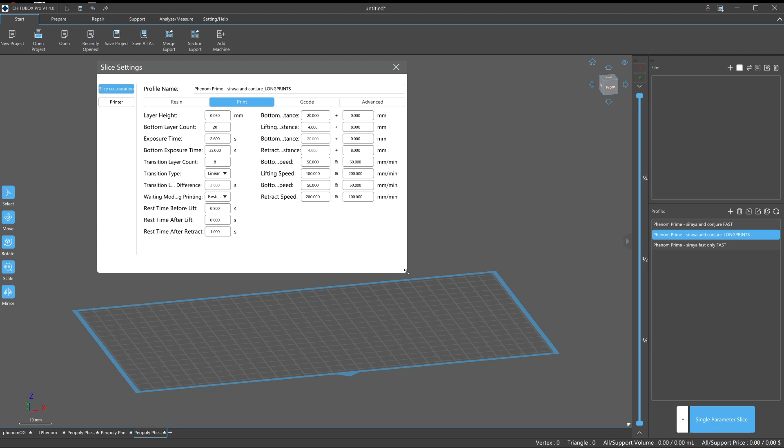Now it looks like they had to fix issues with the... there we go, okay, that's better. Font size, so bottom retract speed. Yeah, okay, so I really should have these set to 0 because I don't have any other values for the second stage of the retract. So that's pretty cool how that's picked that up.

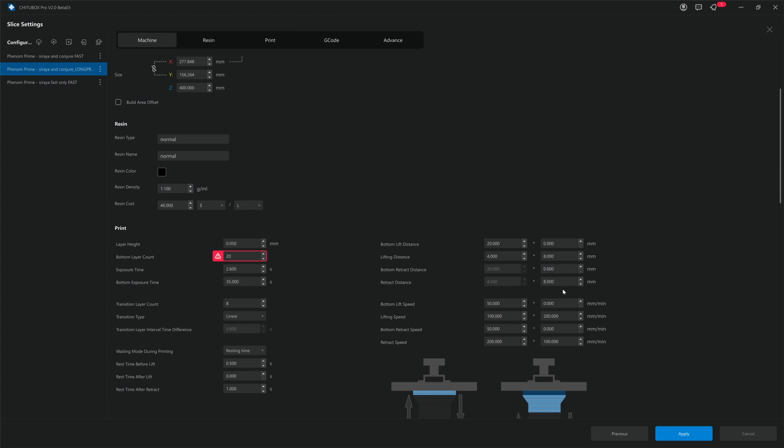So if I set this to 0, which is, yeah, great, okay, so that's good. That is a good feature. That's new. Now looking through the printer again.

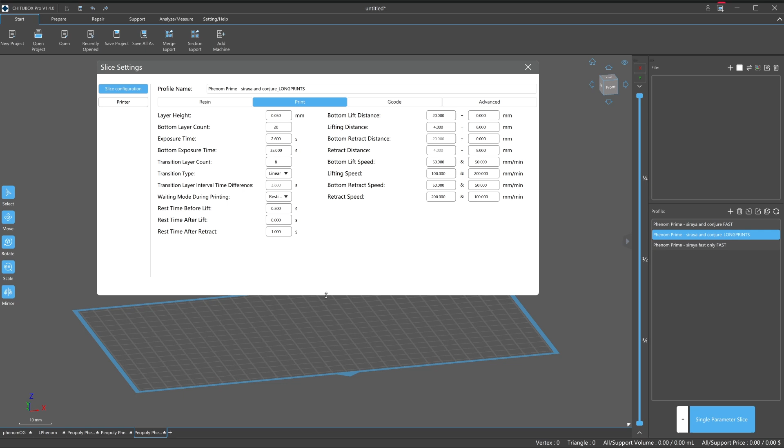Okay, so the only annoying thing I can see by combining both the printer and the resin together is you have to duplicate the printer setting on each one, whereas in the previous version you can copy that printer setting across. It's not a big deal, it's just a different workflow. So yeah, you can see here each profile has a machine setting or printer setting.

So if I don't hit apply, does it not save it? Does it? Okay, it does. Once you hit apply, it takes you to the main screen.

Oh, this is all different. Okay, so let's just go back. So if I close this and relaunch it, what happens? Because that new splash screen with that list, that's all new.

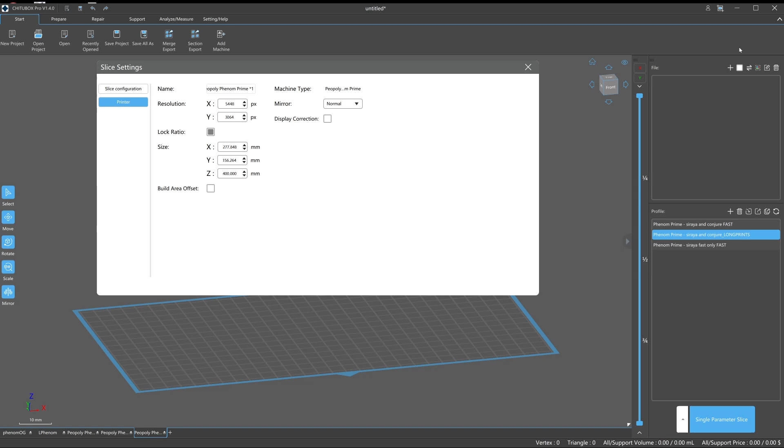I want to know if that shows up again the next time, because I'm running this the first time around. Ah, okay, that's interesting. So that new splash screen is, I guess, what you'll see if you launch this for the first time. And you've got a few annoying little pop-ups here, which I hope we can turn off.

So, okay, so this is the same as before, right? You can add different actual printers on the bottom, and your resin setting is on the right, which is exactly the same as before.

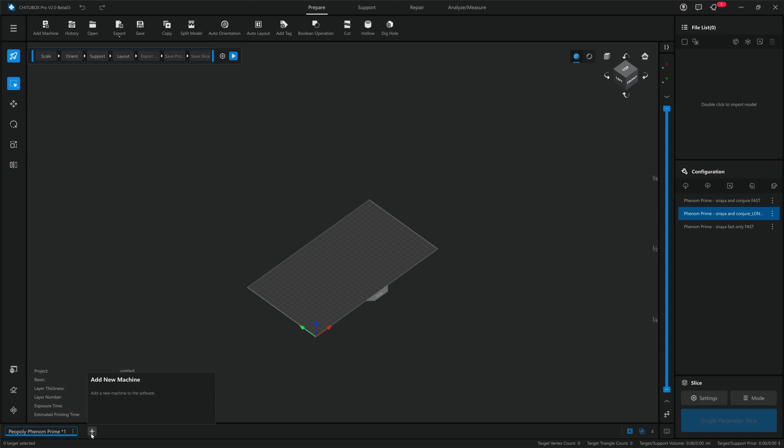So that's good. So yeah, if we add a new machine, okay, that brings up this new list. Interesting. Okay, so let's add in what they have for the Peopoly Prime. We'll just quickly compare the results.

Right, so that's their settings. New, I'm going to add new here. Okay, so yeah, so there, let me... new. Okay, so it looks like the settings do import in correctly, which is good.

What I'm going to do, this is all different. You've got a sliding menu. Alright.

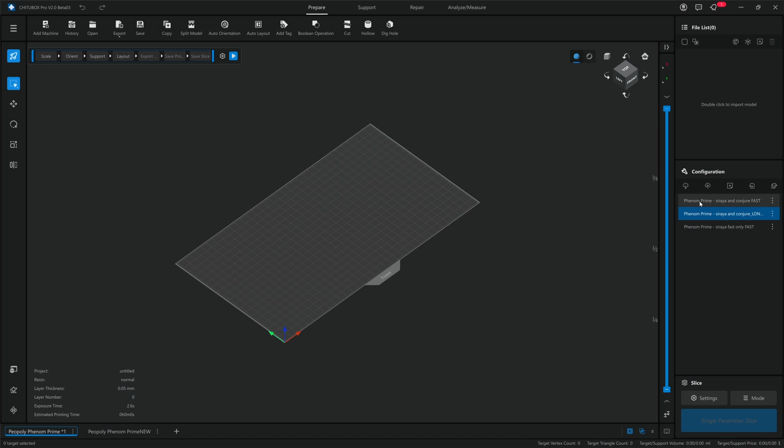So what am I doing here? I want to just rename this. Old. Rename the machine to old. Okay, so the machine setting, I think, carries across through to the different profiles. Yeah, you can open this as well. Okay, that's good.

Now I want to check. So this is new, I don't know what. Okay, so interesting, so it just has a graphical interface showing you what these values affect.

That's good. Now I do wish I could just make this go away. So I like having bottom layers at 20, just to make sure it sticks to the build plate, and that works fine for me. So I wish I could toggle the warnings off or click on it to ignore it, I guess. I don't know, it's a bit annoying having that marked as red, but it doesn't matter. Okay.

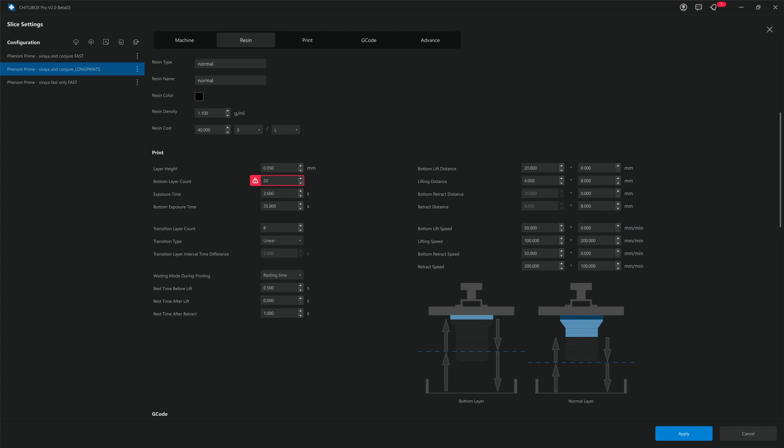Resin settings, resin type, yep, so that's all the same as before. The print settings, that looks all the same as before, I think. Point 0.5 and 1, 0.5 and 1, yep, so that's all imported fine. That's good. G code.

Advanced. Yep, so I have my light set to a slightly lower power. Anti-aliasing grayscale level.

Okay, so this slider is new. Now, if I show you the old version here, it has a little animation showing you what this does, what I'm looking for. Okay, yeah, oh, you can actually go even more now. So it goes from 2, 3, 4, 5, 6, 7, 8. Interesting, whereas this one only goes 2, 4, 8.

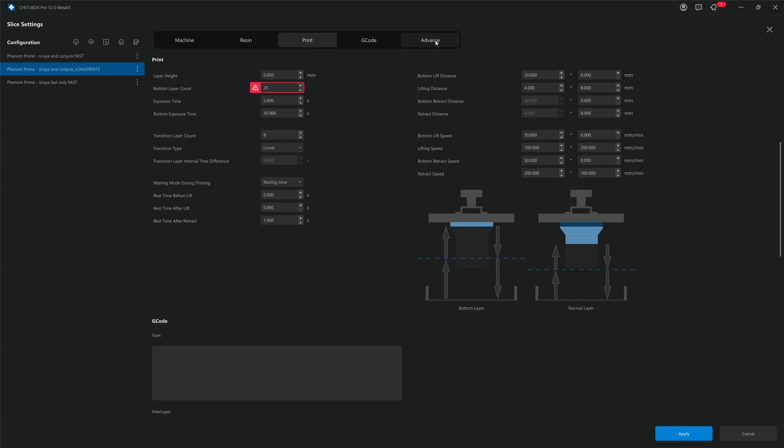Mask is new, interesting. Mask. Oh, okay, again I've never used any of this stuff, so I'm just going to leave it off. And then we go to check out advanced. Okay, so that's that, so you can look at all the settings on one screen here. That's good.

Okay, so yeah, so this shows that you can export your settings from version 1.4 into version 2, and it will carry across correctly, which is great. Now I'm going to check out the settings for the new version.

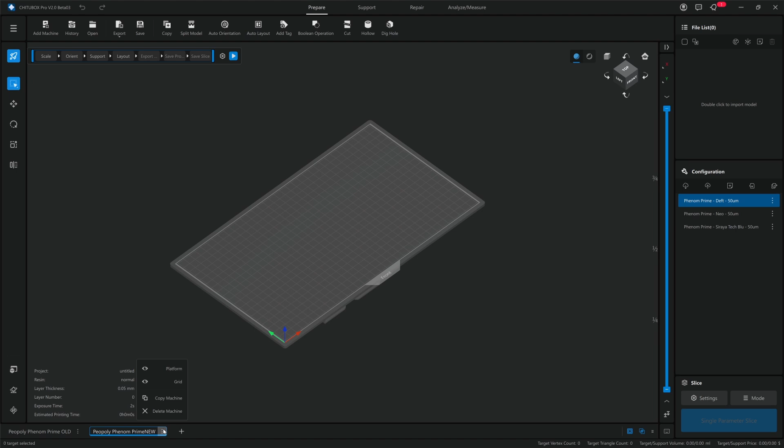I'm just going to see if there are any new settings. No, okay, that's great.

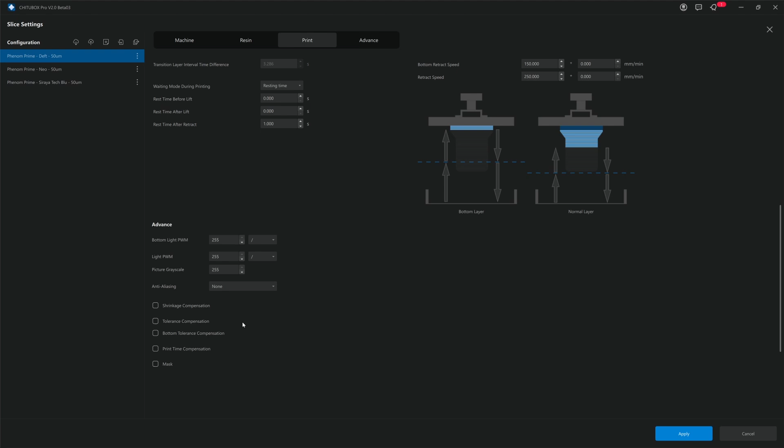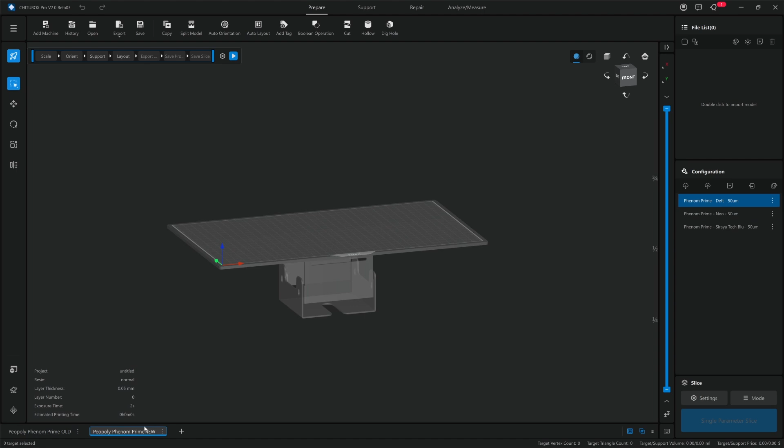The only issue I have is that this X and this X are too close together, so you'll probably at some point click on the wrong one. I have the annoying build plate view disabled on the old one, which carried across too.

Let's move on to the interface. The big change is the color between the old and the new. It just looks a little bit darker gray, which is fine, I guess. Maybe a bit too dark, but yeah, it's fine.

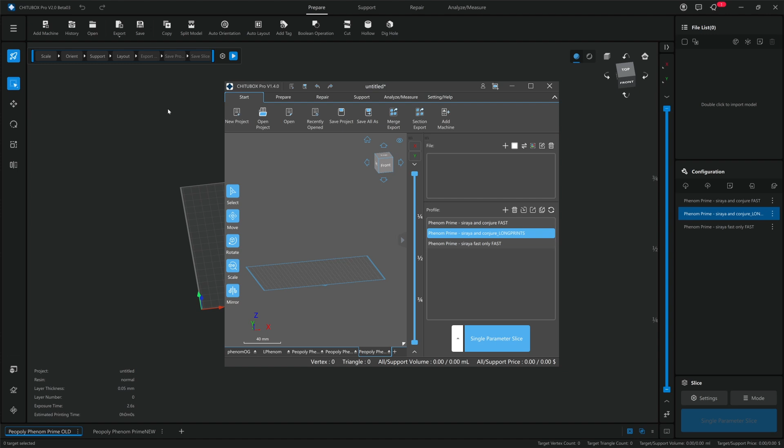Now the icons have replaced the drop-down menus. I do like how they had the different steps organized in their own tab up the top. It's still here, okay, yeah, that's all there as well. That's fine, it's just changed.

What else has changed? Got icons on the left, same as before. These are somewhat new. No icon tooltip, which is a bit annoying. So what am I doing when I click here?

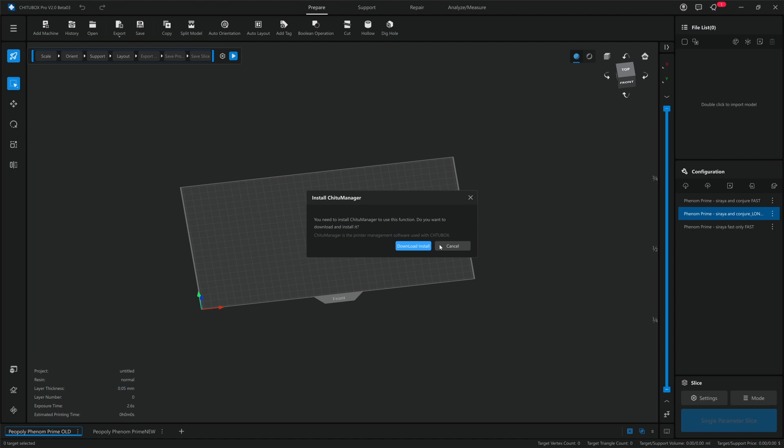Okay, you can import geometry. That's fine, this is the resin. Import settings. Chitu Manager - no, I've not used Chitu Manager and I don't want to install it. It's good that it doesn't force you to install the Chitu Manager with Chitubox Pro. Usually with these programs they bundle everything together, which gets annoying.

Now let's have a look at the interface. I am rotating, panning and zooming. That feels all the same as before.

Now I want to check settings. In the previous version, settings is in its own tab right here, so appearance, you can do your appearance and all that stuff. Now, where is settings in this new version?

This is slicer settings, right? Yeah, so this is slicer settings. Where is the actual program settings? Interesting.

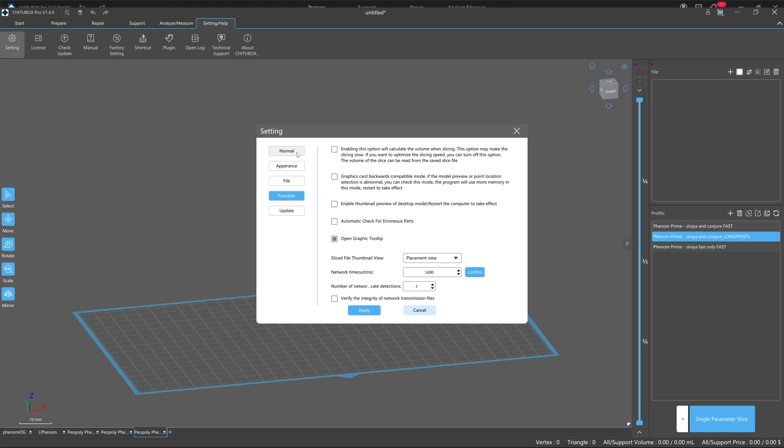So this was where I wanted to have a look. Let's see, I can't expand this window. Okay, that's fine. And if I go to the old version, yeah, the old version you can expand that, which is a bit easier.

Ortho, is it an ortho? Yeah, it was ortho. Placement view. What? That's a bit annoying.

Use same directory for saving and opening. I don't know, yeah, I'll take that, that seems logical.

Model rename, copy model, repair model, mirrored model. Okay. Project naming, okay.

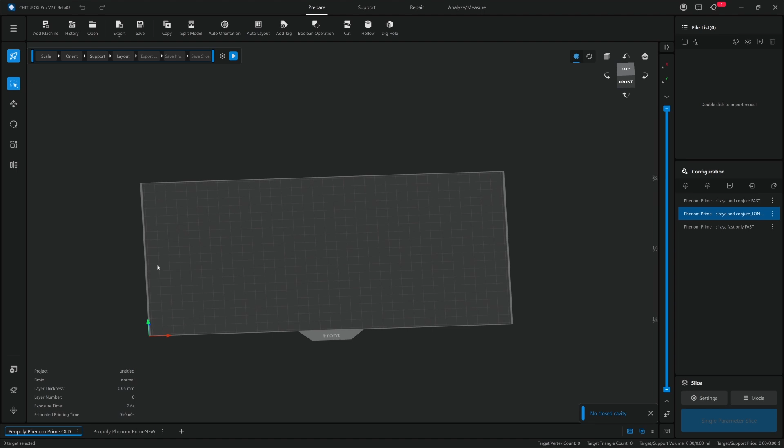So I know you guys want to get into the support making stuff and see what's new and all this other stuff, but I want to get all the presets, the initial setup out of the way first, because that's pretty important.

Now these are all new. On their website it's something called Chitu Accelerator or something. I still don't know what this does. Is it like a macro?

Must be like a macro thing that's... yeah, ChituAction, so it must be a macro to repeat. Interesting, repeats your process. Okay, I don't think I'll be playing with that today, but yeah, interesting - it's good you can switch it off.

Okay, so we've set up and imported the printer profile, the old printer profile, and let's import a model. So let's go to open, and I'm going to hunt for an OBJ file on my other window, and let's have a play with the Nosferatu piece that I recently sculpted and printed, and I'm going to import it in.

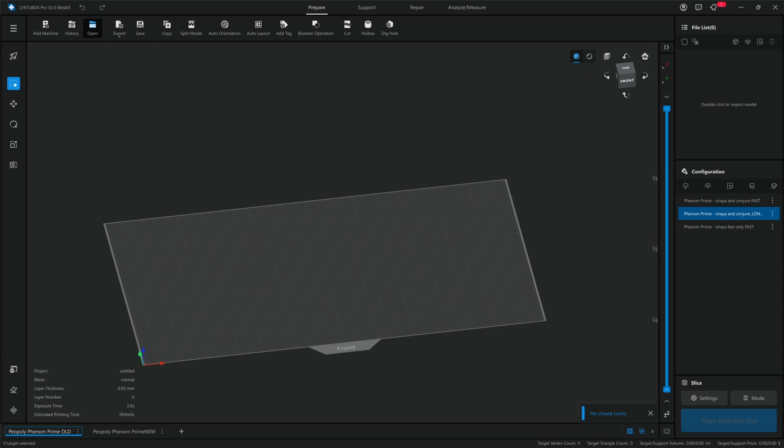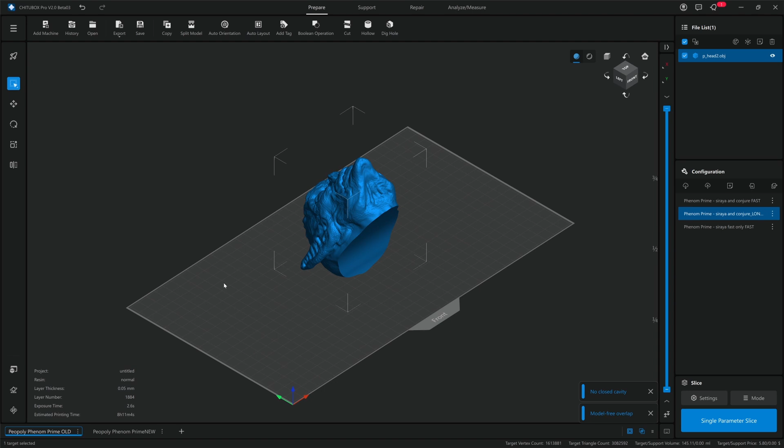This is an OBJ that has been exported from ZBrush, so this OBJ model hasn't been hollowed. I usually do my hollowing in Meshmixer. Just to be upfront, I don't use Chitubox for hollowing because I just prefer the manual process in Meshmixer - that's worked for me perfectly throughout the years I've been printing. But we are going to take a look at the Chitubox hollowing and adding holes, and let's see how that performs - the new version compared to Meshmixer.

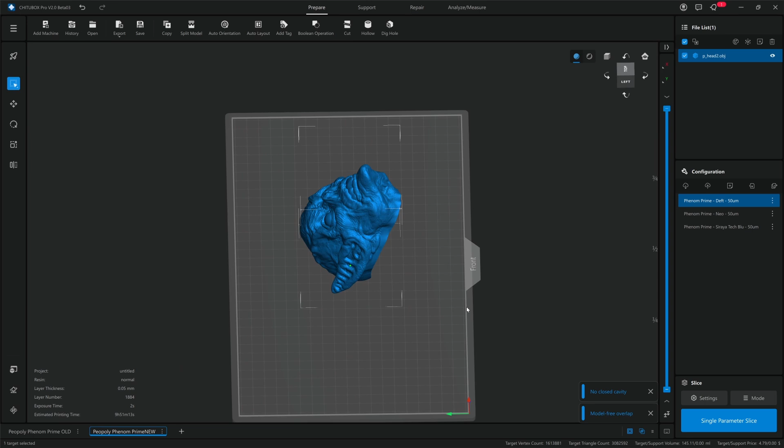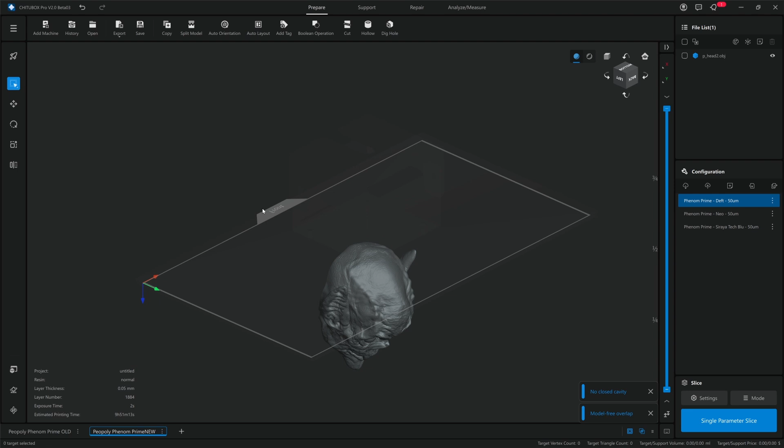Now, one thing I've noticed - yeah, they always say this is the front, but this is not the front. This is the back facing the rails, right? So yeah, if you're looking at it like so in the actual printer, right, they say front is here, but no, that's the back facing the rails, and this is the front facing the door. So yeah, just be aware of that.

When you're setting things up, I do wish you could change this. Okay, so let's have a look at the model now.

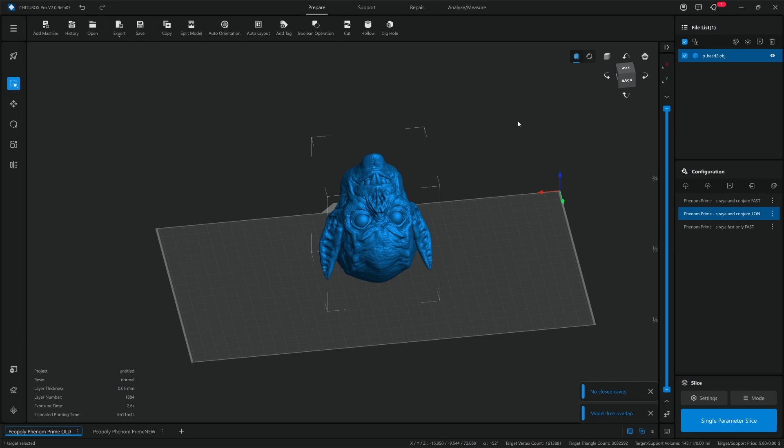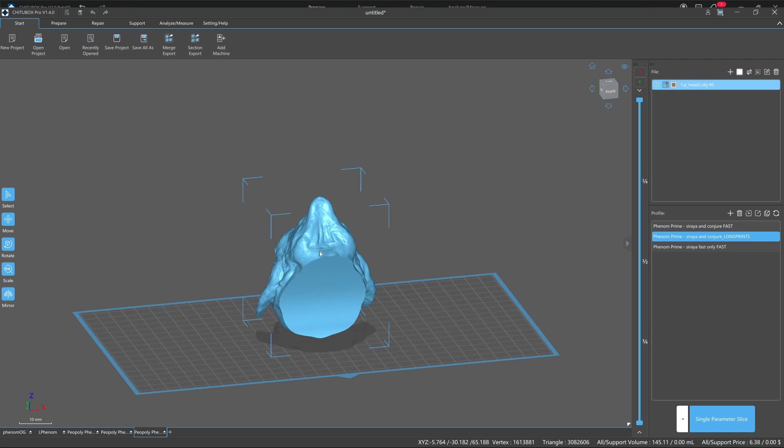One gripe I had in the previous version is you couldn't change the size of the rotation thing. So if I bring in the model on the old version, you can see on my screen it's really small for some reason. See how tiny mine is? In the old version, I have no idea why. It's pretty annoying. So let's have a look at the new version. Great, so it looks like they have changed this.

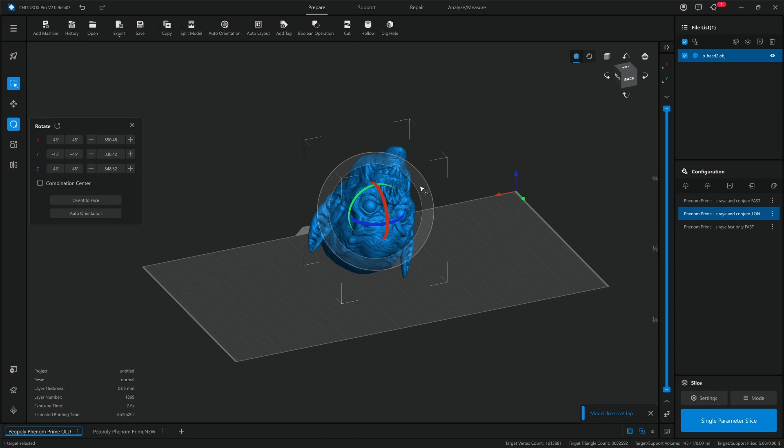It's at least slightly bigger, and you can rotate. These are new. Okay, so you can rotate by camera view angle. That's good. The second angle here, okay, yep, so that's all kind of normal.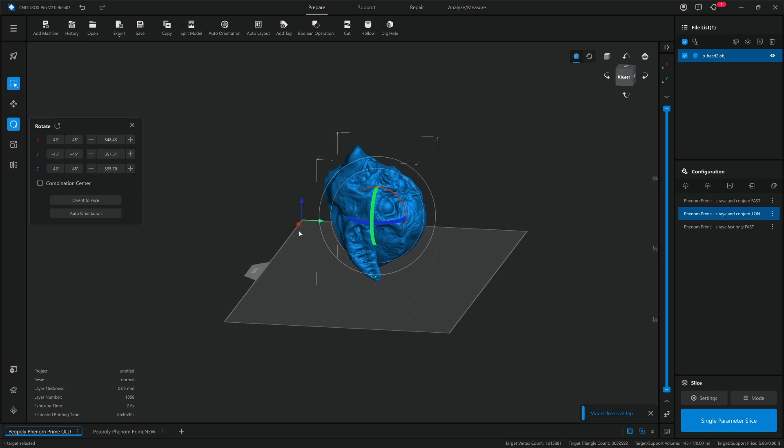Okay, and then we can reset. Yep, we can reset it. That's good. And we also have the presets here of 45 degrees. That's good.

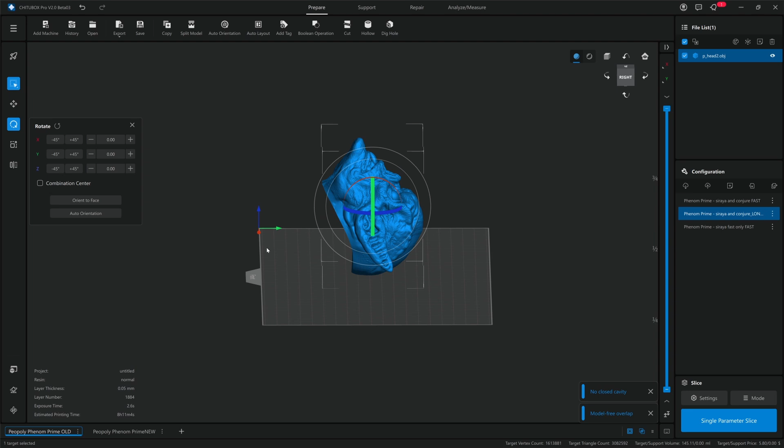Combination center, okay, I think that's when you have more than one model selected. That's fine. And orient to face, let's try this. Yep, that's fine, that's same as before. There's nothing new.

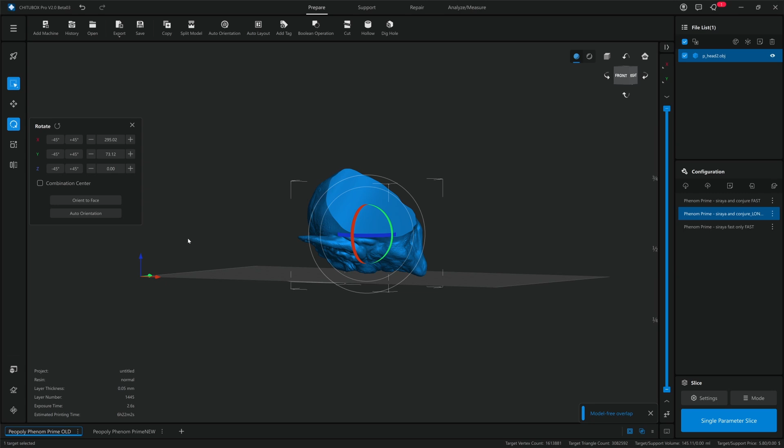Auto orientation, let's try this one. Ba-bow. Yeah, so this is one thing that's always been sort of not great. Auto orientation, that's probably never gonna give you the right orientation for printing. Let's try in the old one.

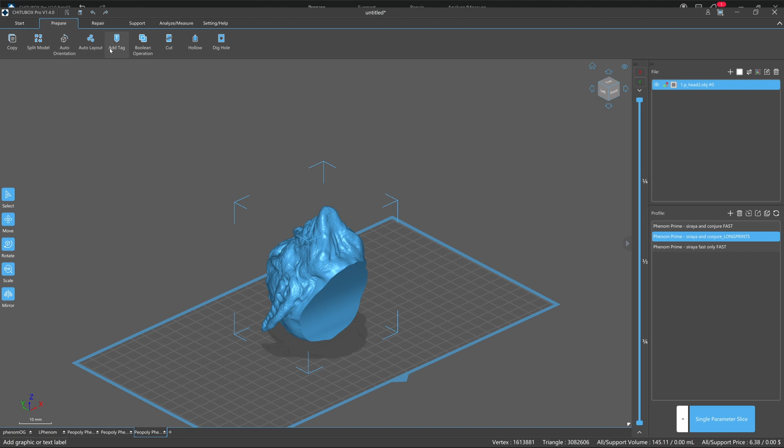The old one, I've never used auto orientation, but it looks like the old one doesn't have auto orient. I thought it did. It does, yeah. Okay, so it gives the same result. So it doesn't look like the algorithm has updated in the new version.

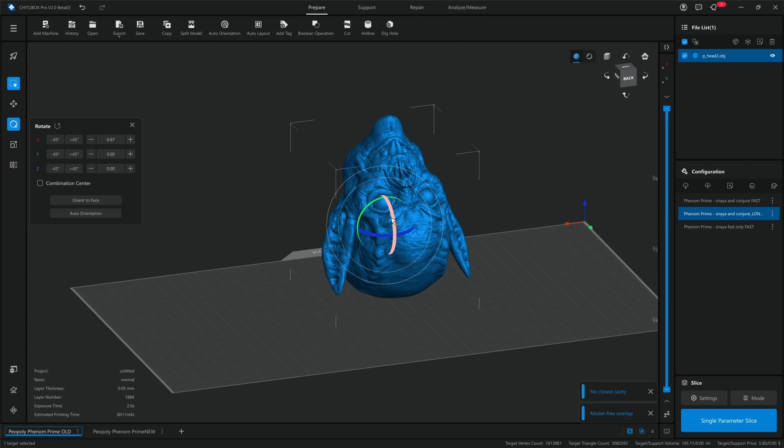So just be aware of that. But yeah, I never use it, so it doesn't bother me. For a part like this, this would be the orientation you want. Okay.

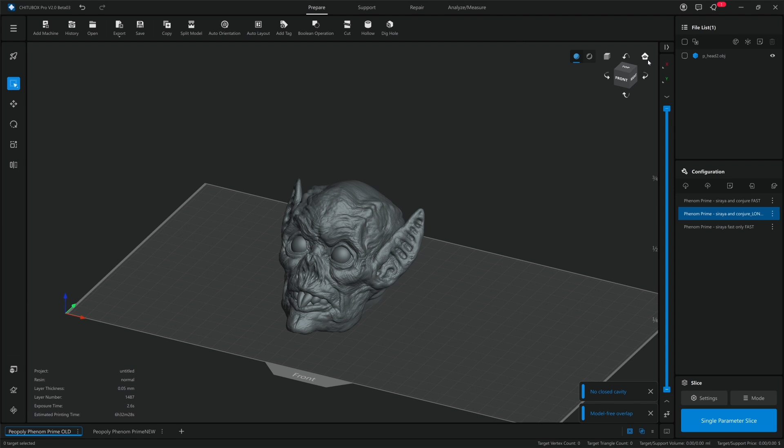Now let's see, okay, so it looks like you can change materials quickly now. That's good. Perspective, orthographic, that's a home button, and then you can also still click on that to get the orthographic view, which is great. So these are super helpful.

Okay, so I always work in orthographic view. I would recommend you do that too. Don't use perspective, it's just whacked. And it also looks like, yeah, the little detection things seem like it's doing stuff.

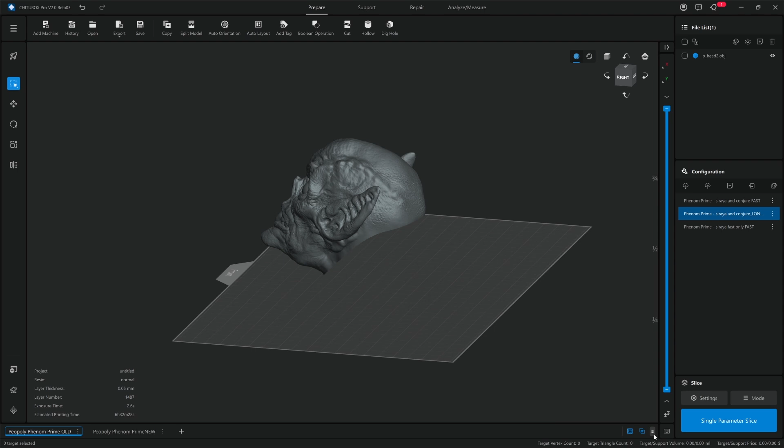Now, just to let you know, I'm running on a pretty powerful machine. It's a Windows i7 with 16 gigs of RAM and a 3080 RTX graphics card.

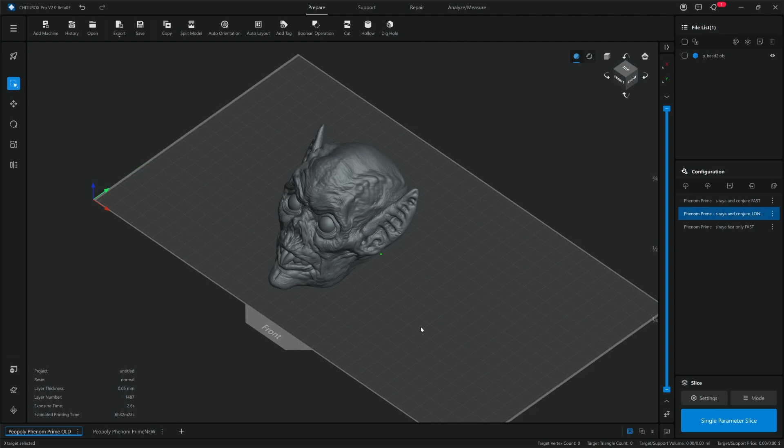Okay, so once we've imported in the model, these are all your normal stuff that you can use to rotate, scale. What is this? Mirror.

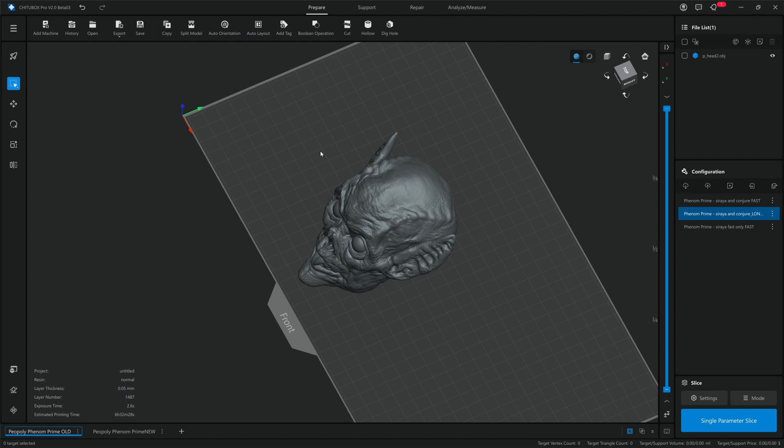Okay, now the next thing, let's look at support. Add tag, what is add? Sorry, next thing, let's have a look at hollowing. Yeah, why not?

In the file list, yep, that seems the same as before. Okay, so let's do a hollow and see. Wall thickness.

.2, damn, that's pretty thin. No, we want to set it to 1.85. Precision: low, middle, high. Let's go with middle for now. Inner, outer, bottom through.

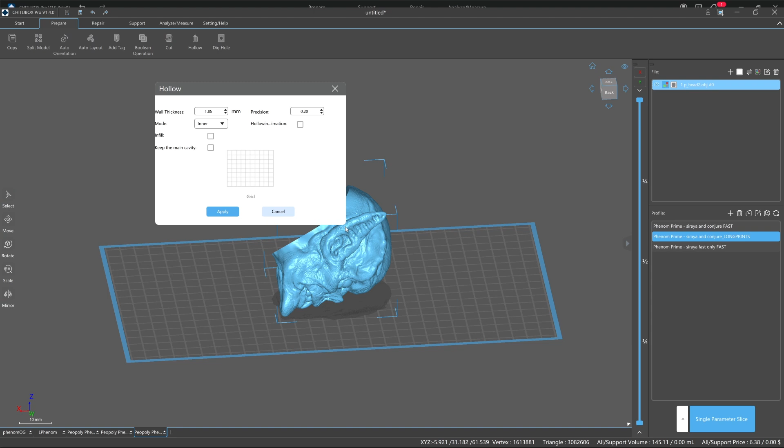This seems new. Again, I don't use the hollow feature in Chitubox, I do it manually in Meshmixer. But let's see what it does. And inner mode is normal. Keep the main cavity, yeah, all right. Let's see.

It's pretty slow. I do have OBS running to capture screen capture, but yeah, it's not fast. There we go.

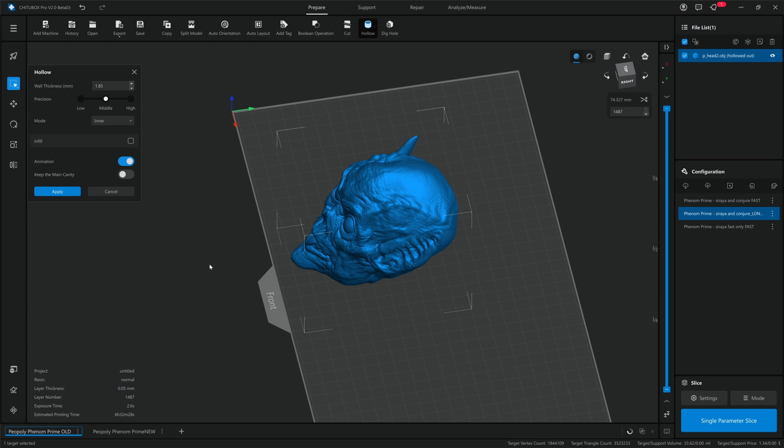Okay, so one thing I have noticed with Chitubox hollowing is it likes to add layer lines on here. So let's just hit apply, and we'll say OK. And let's do the same thing in the old version, and let's see if there are any major differences. Because I do know some of you guys will be using the hollowing feature in Chitubox, so I do want to show the difference between the old and the new version.

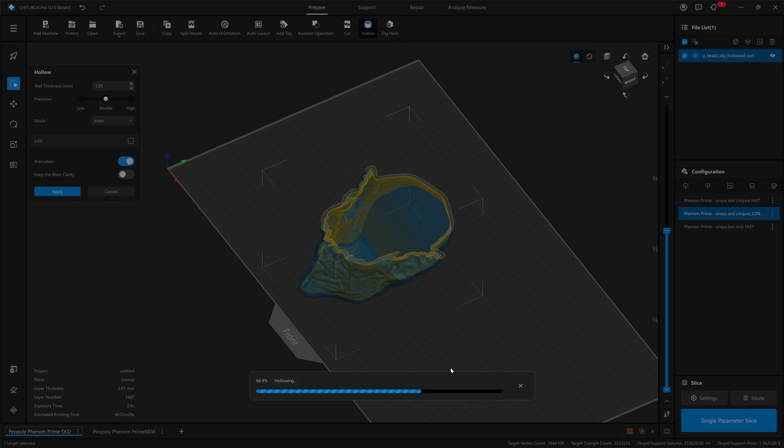Yeah, the thing, that's weird. Okay, so it looks like it's applying it twice. Or did I, yeah, okay, I must have pressed it twice. I wonder if it's gonna freak out. No, didn't freak out.

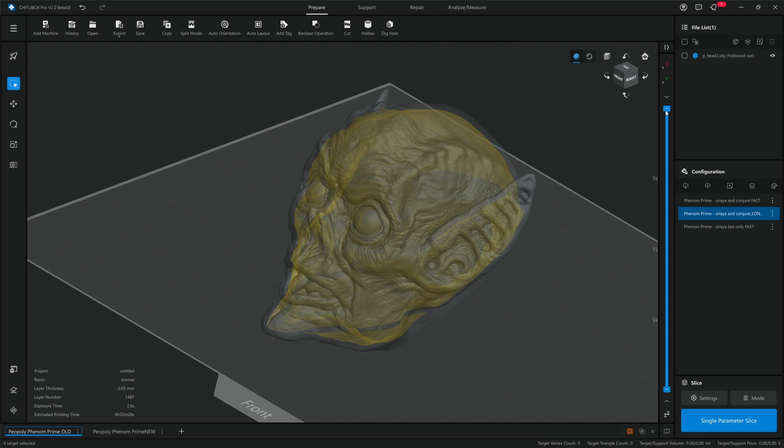So, ooh, I don't know this, what is this yellow thing?

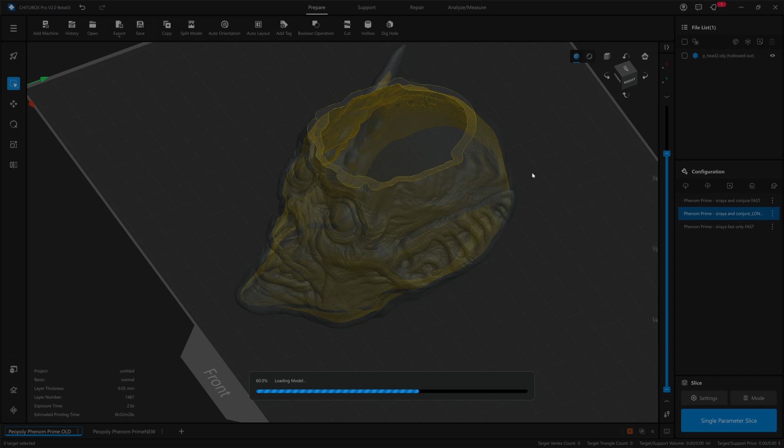Okay, so what I'm going to do, I'm going to import in a hollowed model of this head already. As I said, I've already printed this out, so I know this model is good. And I'm going to bring in the hollowed model that I made in Meshmixer manually, okay? So I can show you guys the difference between the two.

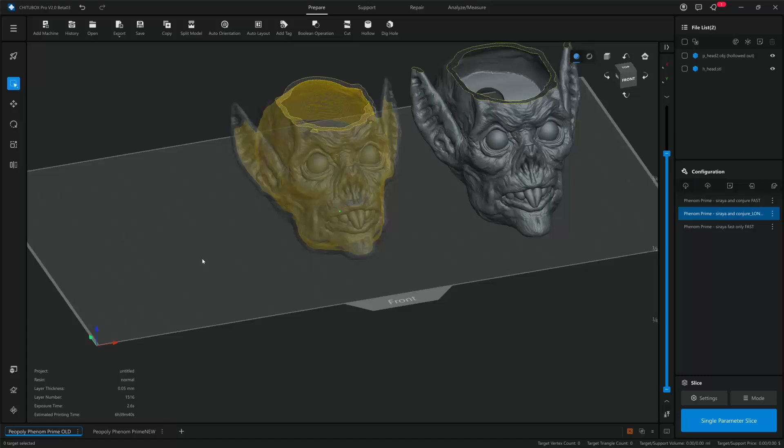So it looks like when you hollow in Chitubox, it gives you this yellow inner preview, whereas if you hollow it externally, it will just show that. Now, does that mean that I can go back and it saves a copy? No, it doesn't.

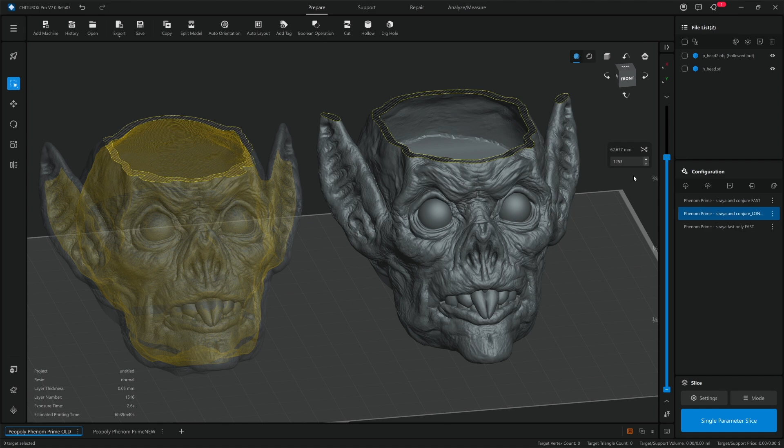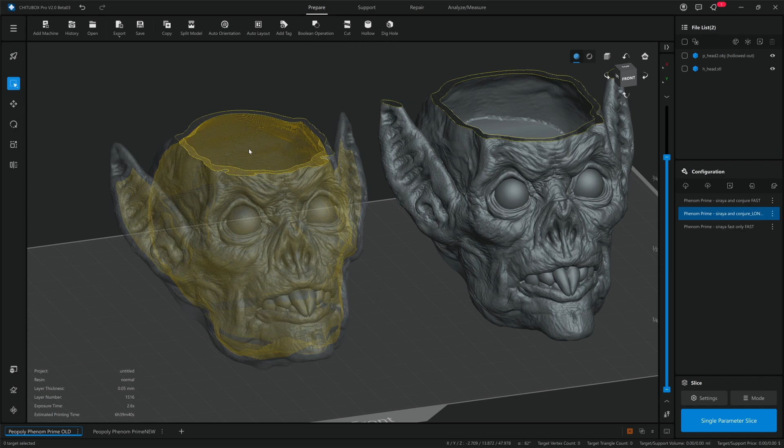What I wanted to show you is an issue I've encountered with Chitubox hollowing: it adds weird layer lines in the hollow on flat surfaces for some reason. You can see it here, but it seems like it's not going to show me because it's done it within the program.

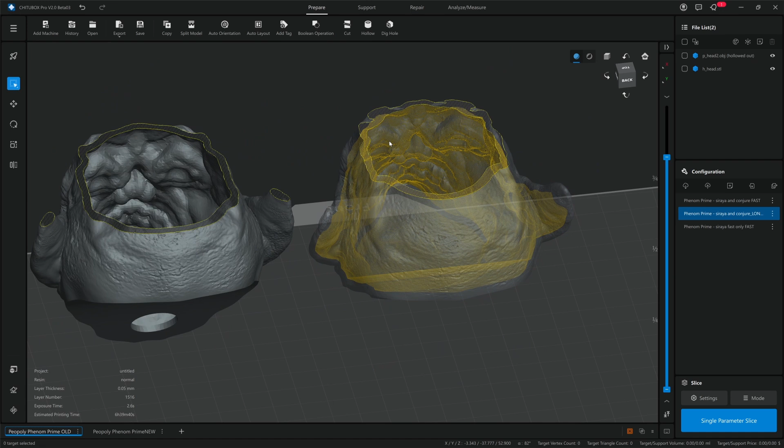So what I may have to do is export it. It's a little bit annoying, isn't it? I just want to be able to view the model as is without this special hollow yellow overlay thing. That's really hard to see what's going on, right? Compared to this, which is what you should be seeing.

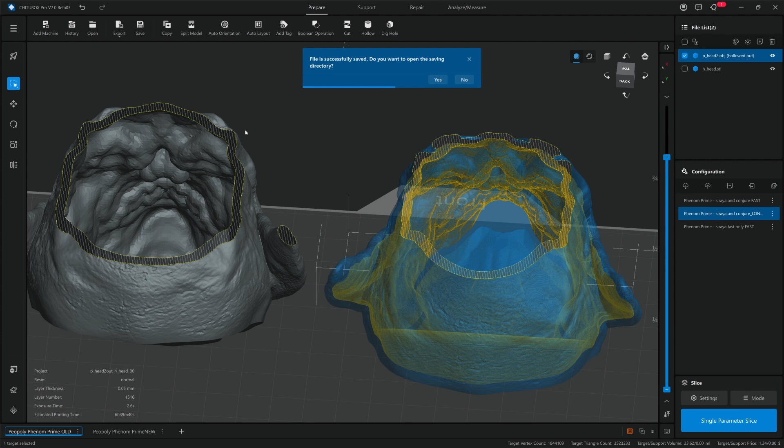So let me save this project and I will export out the STL and we'll bring it back in, okay? Now the Chitubox project — it looks like it adds strange characters to it, which is probably not great. You can see here. So let's export this out and we'll bring it back in.

Yeah, because this is annoying. It's not like it's a non-destructive thing where you can go back. So why have it as a different color? I don't get it. Not needed, guys. Just switch it to a normal mesh preview.

So, export. Again, no tooltips, which is annoying, and you can't export directly from the menu, which is annoying. I'm right clicking on this, and what would be great is if I could right click on the model and select export rather than using this menu here. So that's one thing I would like to see.

Because I only want to export this file, I don't want to export the whole build plate. And again, it adds a funny bracket to the file name, which is not good — guys, get onto that. Also, when you go to export model, it defaults to a Chitubox file, which I know somebody has complained about already on YouTube, and it's annoying.

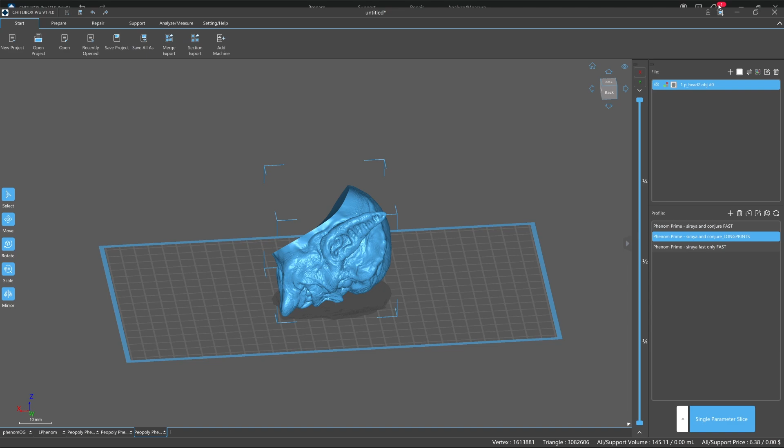So when you go to model export, it should default to an STL file, okay? Not a .chitubox file — that's a project file. It didn't do this before in the previous version. I can go here, select the model, then go section export, and you can see that it defaults to a Chitubox file. So please fix this.

Export. Oh, okay, my apologies — it does save it as STL. So maybe you just had to change it. It doesn't default to the right setting, keeping it consistent. Alright.

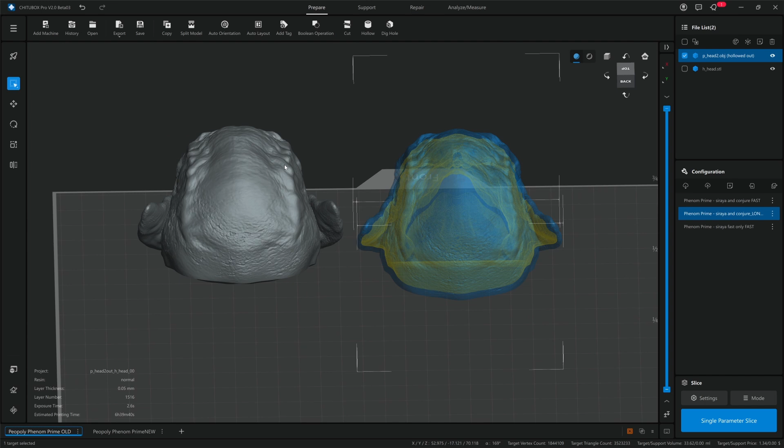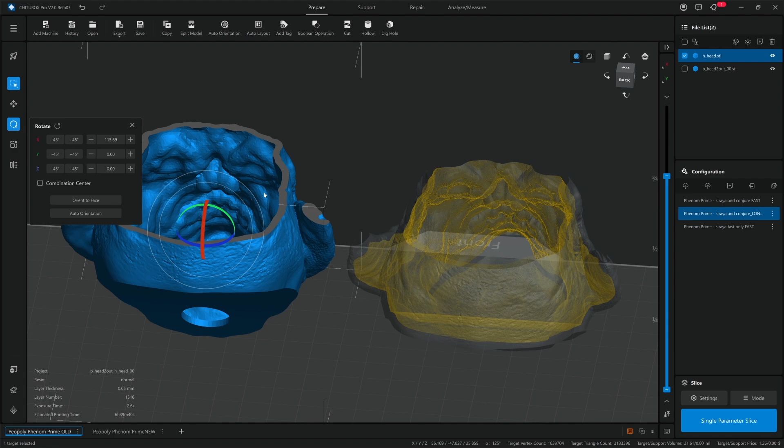So I'm going to delete this and import in the version 2 hollow head. Okay good, okay so this is the... oh, it still does it. Why? Why? I don't want the yellow preview, get rid of it. That is really bad. Has it always done this, guys, in Chitubox?

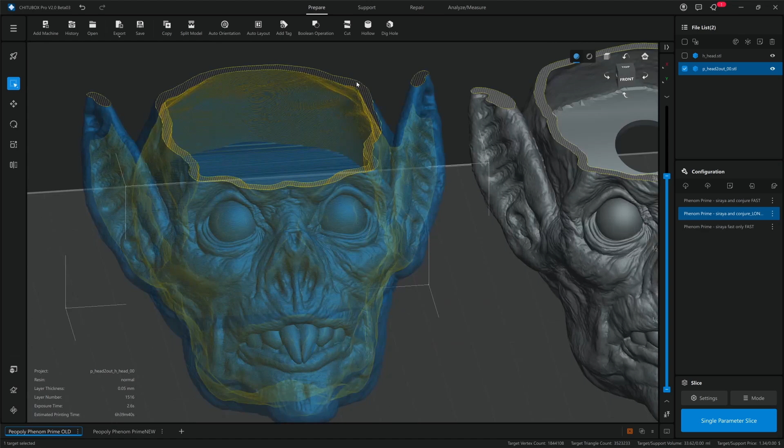Again, like I said, I don't hollow in Chitubox, and I don't remember why, but I think it was because of this annoying thing — you can't see what's going on, right? You need to be able to check the inside, the integrity of the inside mesh. This yellow overlay thing just doesn't work. So, that's hollowing.

So it looks and feels exactly the same as before. If you want to use Chitubox hollowing, you can, and it works the same as before. So no changes there. Okay.

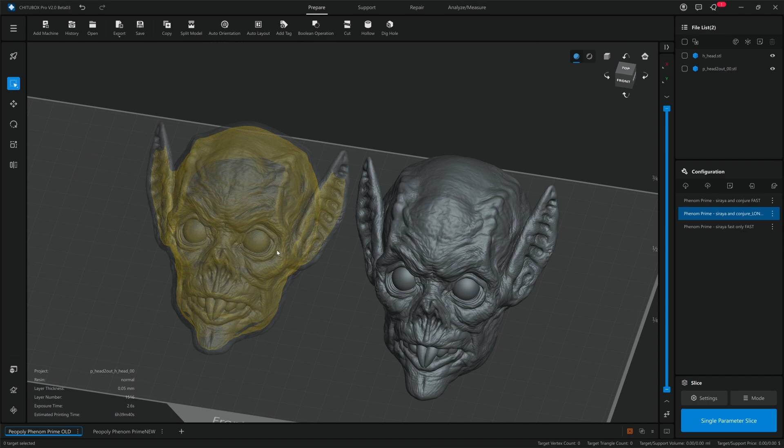What about digging holes? Let's dig some holes. Dig hole — yeah, it looks the same. What I do like about the dig hole option in Chitubox is that it saves the part that you dig out. You can't really do that in Meshmixer.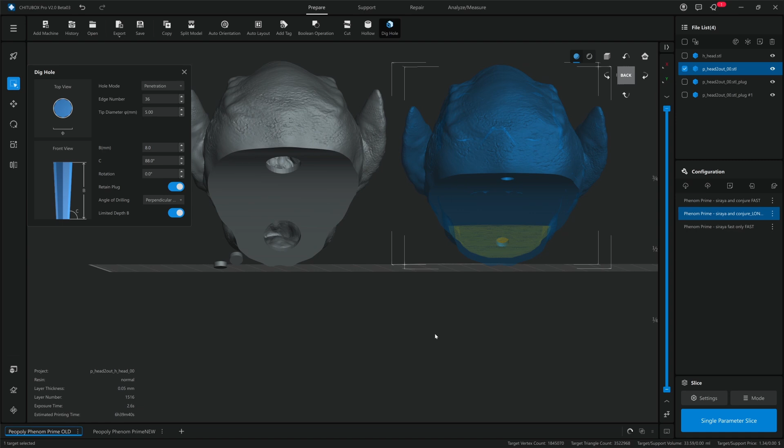So yeah, that's one good thing, if you do want to print out the cutout separately — that helps. And yeah, that works the same as before. Okay, so you can sort of see it here — see how whacked it does the inner surface in Chitubox?

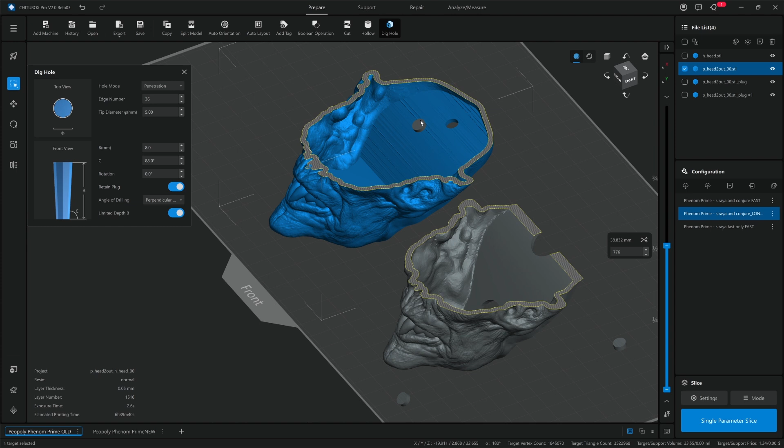Whereas if you look at the hollowing in Meshmixer, it's nice and clean. So, yeah, this is the same as version 1.4. Just beware of that.

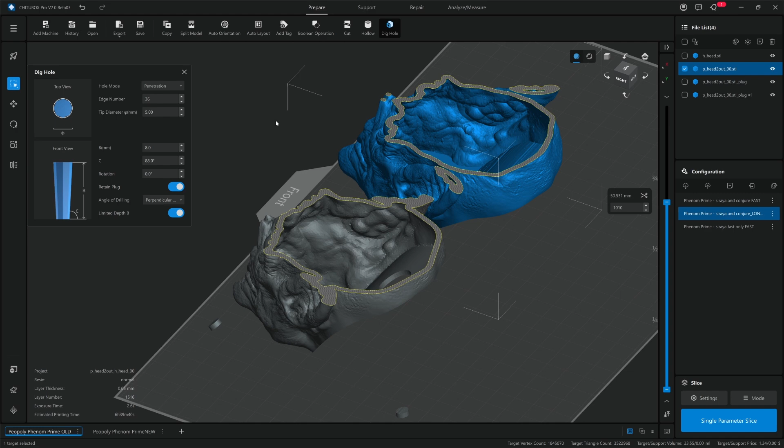My suggestion, as a professional, is to do the hollowing manually in Meshmixer. That way you can quality control exactly how it looks on the inside. Because in Meshmixer you can also do a little bit of sculpting, so you can smooth things out if need be. But if you're in a pinch, or a newbie, or just wanted to get it done, then that's fine — you can use Chitubox for hollowing. I'm not gonna judge you on that. Just be aware that there's some weirdo stuff going on the inside.

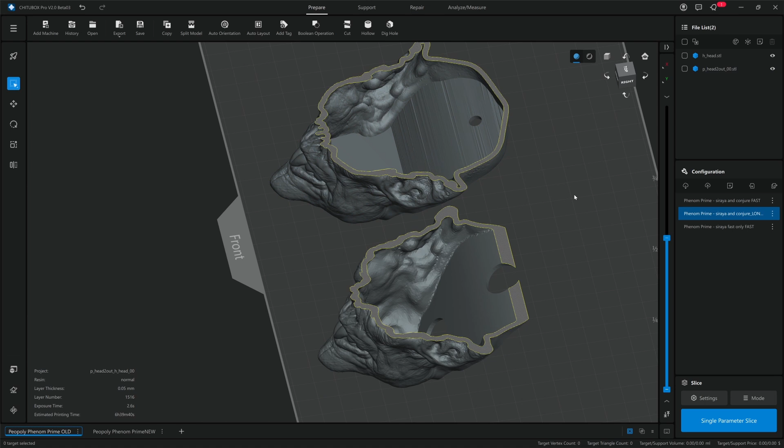Okay, so we've got a ton of different files now, the little plugs — let me get rid of these. Let me go. Okay, so now the second part is the supports.